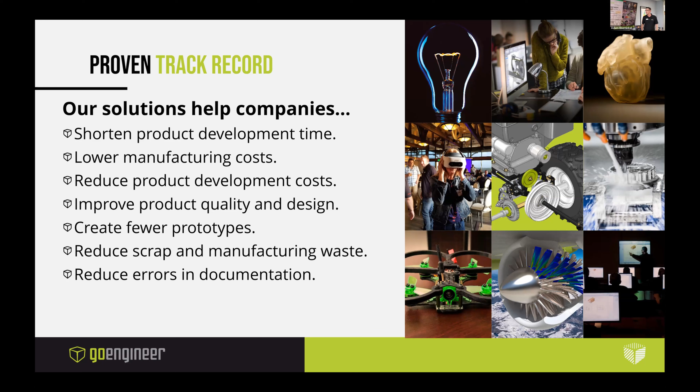Application mentoring sessions is highlighted there. That is not training, but the ability to schedule a one-on-one mentoring session with an application engineer. So something as simple as, hey, I have this new project, how would you approach modeling this, how would you run this FEA study? Anything of that nature, they're there, you can just click a link and schedule some time with them. Again, like I said earlier, training's big. We have 50 training labs across the country.

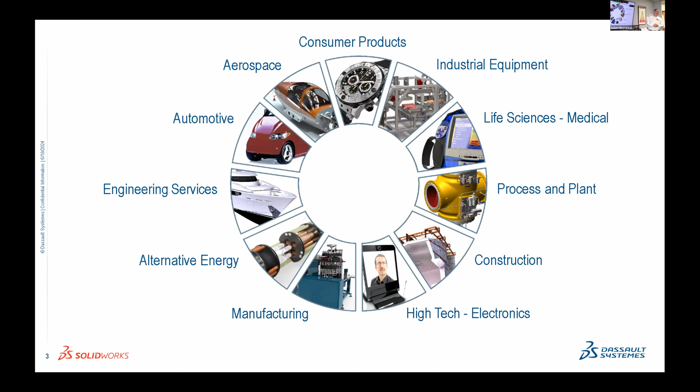In all these industries, automotive, here at Altec, that's kind of like almost your industry, as well as manufacturing and processes, with those cranes that you have on those trucks as well. But in all of these industries, what do you think they have in common? Yeah, CAD. Yeah, SOLIDWORKS. So why not master your skills with the SOLIDWORKS certification.

You may see, I don't know if you can tell, but there's some rain clouds up ahead. You may not know exactly where to start your certification journey. Sometimes it may feel like driving through a small town. It's like you'll get going and you'll gotta slow down, and then try and pick it up again. But where do you start?

We have different levels of certification that you can accomplish on your journey. Does anyone know the first level of certification? The associate, yes. And what about the second level? Professional, yes. And the third level? Expert, good job. So yes, we have 3 levels of certification.

Within our SOLIDWORKS certification program, the first being the associate, that's designed for anyone who has taken a training course or essentials. We highly recommend going to your reseller. They're the best at what they do and sharing their insights and knowledge for these trainings. But with any real training within SOLIDWORKS, you can take the associate to just prove the mastery of your skill level as a benchmark. And then when you get at least 6 months experience and you're a little more proficient at that tool, you can then take the CSWP, the Certified Professional Exam, which is geared to time efficiency, how well you can design for change, configurations. Brad did a really good presentation yesterday on configurations, I believe, and how to best use them. So all those essential tools will help you.

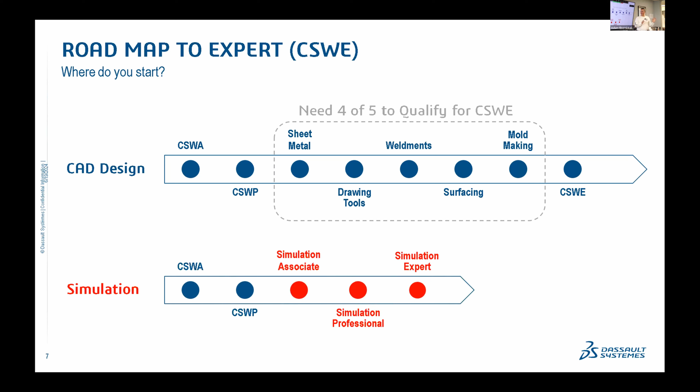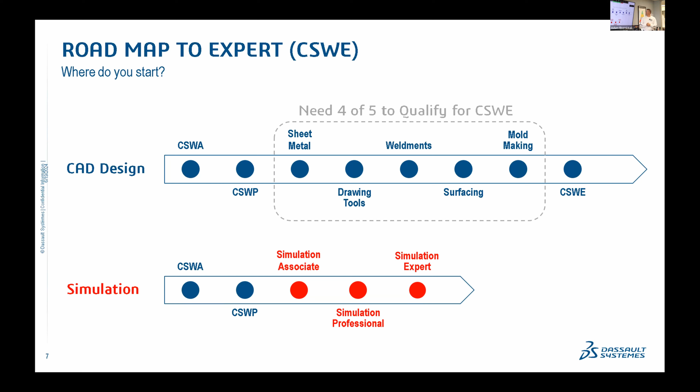Simulation. Yeah, we have an expert simulation track that you can obtain. Fewer certifications to qualify, but just another track that you can achieve to become an expert. And if you have an opportunity to visit 3D Experience World, Brad did a presentation in Nashville on some of the benefits of going to 3D Experience World and how to justify that trip. Well, becoming an expert, there's some incentives there that we give to just celebrate all the experts around the world. And so that's for the simulation track.

Now, some updates that we've done, just to educate you on what we've been doing this past year. We've actually consolidated some of our exams, as well as did some name changes, just to bring to your attention. One of those is with our SOLIDWORKS desktop, the CSWA, and we also have a CSWA on the platform for SOLIDWORKS. Well, now, with the SOLIDWORKS connected app on the platform, it's become almost in line with the SOLIDWORKS desktop, where you can take the CSWA with any flavor. So we really just consolidated those 2 certifications.

And now we have CAD design. This is our CSWA, the associate level. There's just 1 exam, 1 certification you can take, with the desktop or on the platform. I know Brad and Adam are using the SOLIDWORKS connected app for their presentations. And with the exception of the reload, it's very, very similar with all the functionality and tools. So it's getting there. We hope by the end of the year, the SOLIDWORKS connected app will be in line with the desktop version.

Now, if you happen to mate things to those patterns, it's got to go back through, solve the mates again, and reload, causing a circular loop. So that's a little preview of what is to come. Go to the next slide here. And then it displays the results on the screen. Kind of complicated, right? Just to open a file. Okay, so here's the whole process for just opening a file inside SolidWorks.

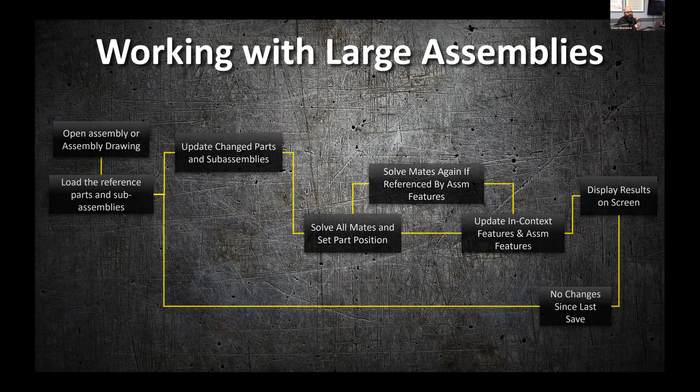Oh, yeah, big deal. How does it apply? Well, think about an assembly that you've opened and it's taking a lot of time. Which part of the process is it slowing down on? So we're going to go into some large assembly tips and tricks now and kind of go from there.

So first things first, SolidWorks settings. Now I know here at Altec, we deploy a standard out of the box set of settings. Okay. Yeah, set of settings. But we do, the admin image has room for you all to make your customizations. In the chat, you guys, depending on what company you're at, it depends on what they allow. Sometimes you're not allowed to change anything. Sometimes you're allowed to change everything.

That's kind of scary. So, both. It is kind of scary.

All right. So, we're going to dive into our large assembly settings here. And so it's going to be on the system options side. Under assemblies, we have some options here that I like to keep selected. I typically don't do autosaves on large assemblies when it's in large assembly mode, so I turn that off. Do not rebuild when switching between screens. I hide all the planes, sketches, and annotations inside of assemblies.

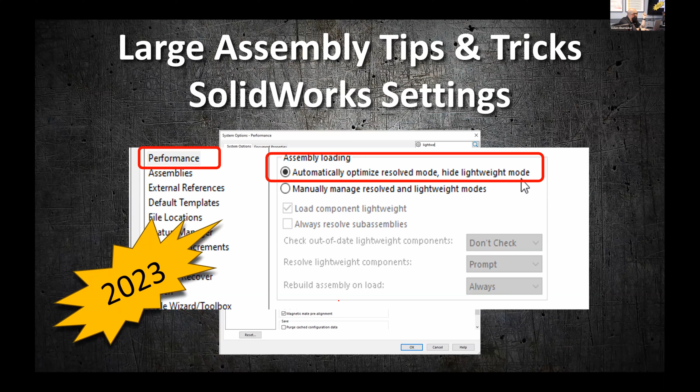Another thing too is if you're trying to take measurements or pick midpoints for measurements, because they are lightweight, you can't pick a midpoint. Before you could expand it in your feature tree and it would resolve it. Now you have to physically go and open the part to get it to resolve and then come back. Or tell it to set to resolved in the feature tree. Actually, I don't even think it's there now. So this was brought in 2023. This is set up on all of our company deployed laptops. Yeah, resolve, not the feature tree.

Well, now that you got your settings, let's get to work. But wait, there's more. Slow down before you do anything. Think before you open, and ask yourself, what kind of work are you going to be doing? So we got two camps, right? If you're opening a file, you're either going to be modifying that file or referencing or viewing it or showing it off to a customer or a supervisor or a colleague. So we'll start with modifying your large assembly.

Well, we're going to start opening this part here. It's 42 megabytes. Pretty complicated. This is part of a sales model for a crane. So I'm sitting there thinking, this is going to suck. And for people older than 30, you might recognize this movie. The sweating happens. Am I going to crash it? Do I have everything ready to go? Do I need to go get a coffee break? I don't know. We're going to do an investigative open first on anything that I've never opened before. We're going to jump back into SolidWorks.

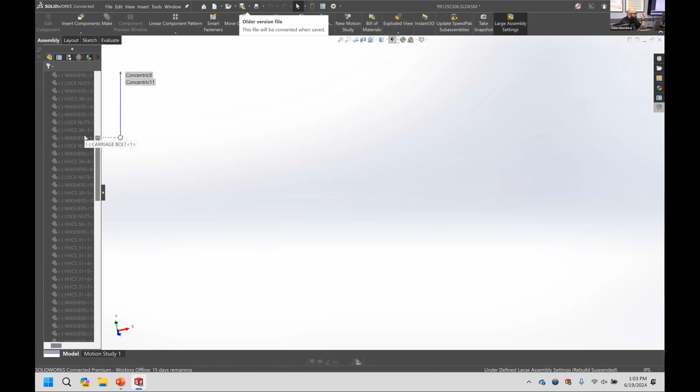So what's it going to do? It's going to open that file. Nothing's going to be in it resolved. But now I can see all the parts that are listed, what files are going to be where, and start rolling them back, unsuppressing them or activating them, and seeing where our issues are going to be.

Why is this file really large? Is it the shape of the part? Is it the number of parts that are in there? What's going to be causing my problem? Now, because I just picked the chassis, it might take a minute. But it's going to look for that file and it's going to pull it and resolve it, fully resolved, while the rest of the stuff stays suppressed.

And it's going to make a liar out of me. It's going to crash, I bet. We'll see.

Well, while that's waiting, we'll jump back into the PowerPoint. I'm going to show it to you again in photo form for the people that are on the Zoom, so they can get screenshots. Find your model you want to open. Click the configuration drop down, go to advanced, pick the configuration you want, or create a new configuration of structure only, and then it'll open with everything in there suppressed. So you can just work your way through.

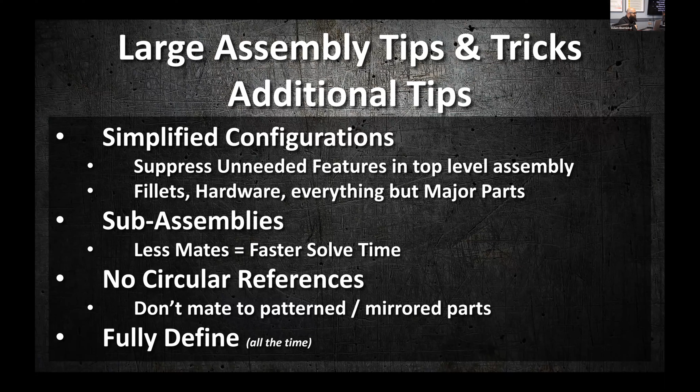So, big stuff: limit your complex features, helical sweeps, threads, get rid of them. If you download parts from McMaster-Carr, double check that stuff. They have the image quality cranked all the way up, all the threads shown, all the fillets there, everything's in there.

Defeature your parts down with simplified configurations. Patterns and mirrors are your friends. Use them. They are a faster calculation, because instead of having to find and recalculate where this new screw is going to be, it's just moving the body.

Roger had a question: I understand fully defined, but if clocking the part doesn't matter, like a bolt, does it need to be locked down? Yes, it does, because SolidWorks is not having to think about where this is going to move to. It might be just locked in place but spinning, but the software is still having to anticipate the change.

Local files: with us at Altec, we're good. We pull everything from a PLM to a local drive on our machines, except the one I'm working on, because I'm working off my Google Drive for this presentation. What it's doing is eliminating the network problem. You're not having to transfer data across fiber or CAT lines. You don't want that, you want to be able to just use your machine as a resource.

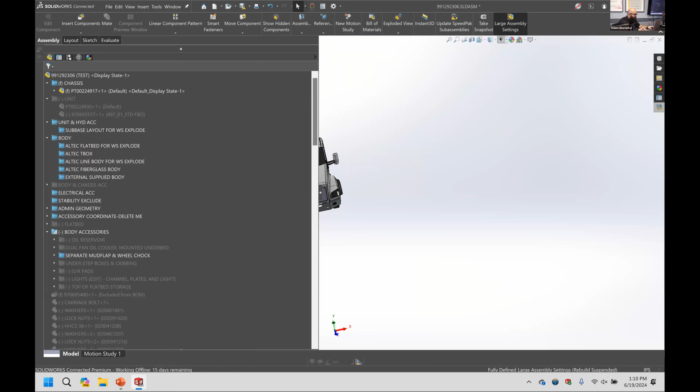Oh yeah, there it goes. See what happens when you pull it off the network drive, it's got to download through the Wi-Fi. But let's close that back out.

So now that we've created the model, we want to show it off to our customer via a PAM kit, or at a trade show, or to some of our buddies, like 'look what I designed this week.' So don't fully resolve the model. If you're not planning on doing any work in there and you're just showing it off, don't resolve the model. Use large design review, it is the shortcut.

So we'll do the same thing here. We'll open this assembly, right? This is a full sales model, it's 169 megabytes. We can go into our open tab, click large design review, and it'll open there. That's under your recents. But if you're going to pull it from open, you can do the same thing by clicking the part, selecting the slider to large design review, and hitting open.

Another way, which I learned from Alin: if you're going to grab and drag, this one's one I learned recently. Click the part, hold the Alt key, drag it down. Let's see if it does it on the connected version. It should pull the open screen. If not, I just wasted everybody's time.

Yeah, I didn't. So it looks like it's going to resolve it. But I believe when you click and drag it in, or click and hold Alt and click open, it should allow you to do that. Let's just stop that real quick and close it. We'll crash it. Oh, taskbar settings.

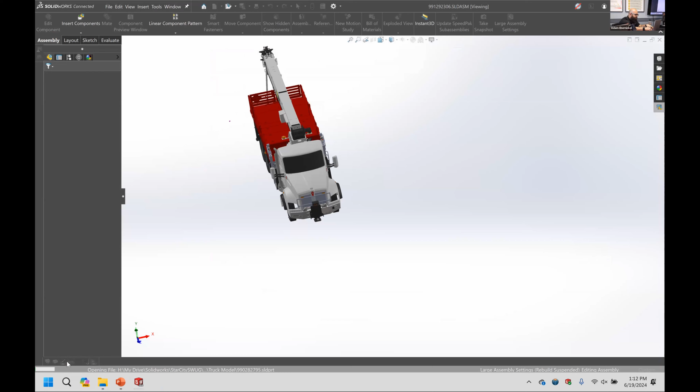End task, there we go. All right, we'll pull that up again. Now I've got myself curious and I want to make sure I get this right. Oh, my mouse is still... all right, there we go. We'll open that back up again. You're saying hold Alt. I did hold Alt and drag it in. I'm wondering if it's the connected version. I think it's a SolidWorks Connected thing. Okay, we'll try it with Alt and then click the button.

It's the first crash of StarCitySWUG 24. If you hit Alt and click it, it won't do it. On regular SolidWorks, you hold Alt and drag it in and it'll open your auto. It'll open the... dang it, I don't want that. What'd you say? Epoch says drag in and then before leaving, hold off. So maybe it's the timing of when you hold Alt. I don't know, we won't worry about it right now.

There we go, interesting. Well, I somehow broke SolidWorks and Zoom and the TV. Does everybody on Zoom still see me? Okay good, just want to make sure. I don't want to break everything. I can't get rid of that. I know. Okay now, jeez. Actually, there we go. First crash of...

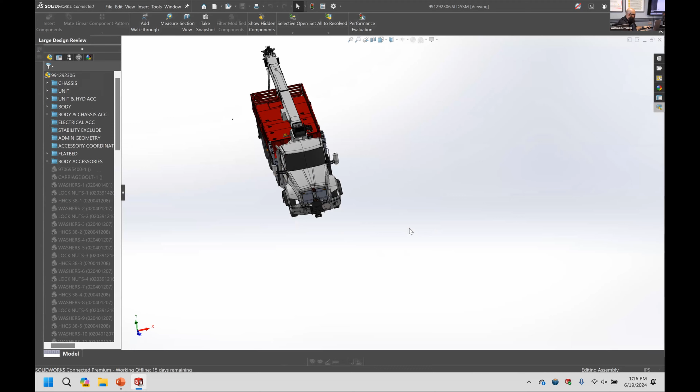All right, so okay, stop. 38 seconds for a full sales drawing. All the parts are there. You might be able to see the icons have a little eyeball on them. You're just viewing them. You open inside the parts all the way down to just the parts - there's nothing underneath the feature tree, it is just a graphical image.

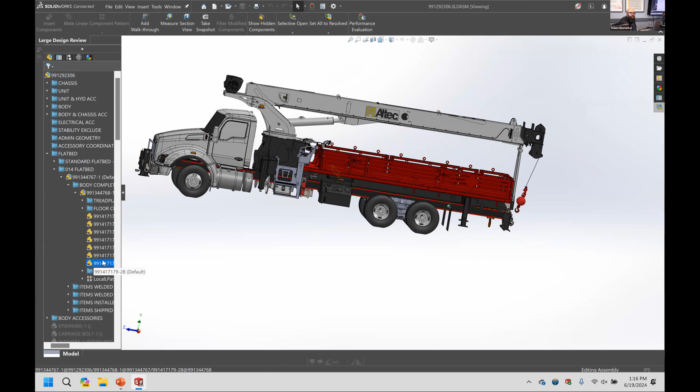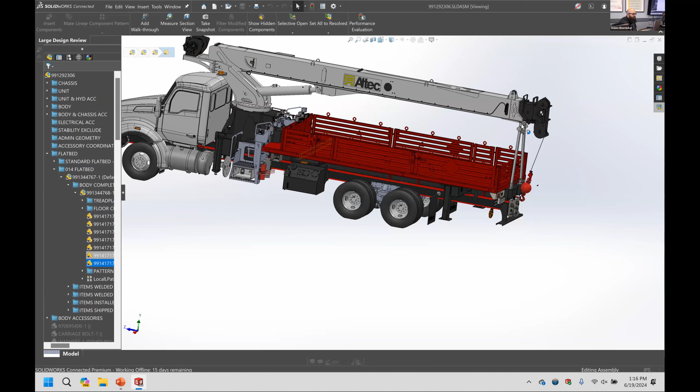We'll go to our selection tools. I'll select what I want to select to open. I know I'm just going to work on this section here. I'll do my selective open, just those components. It's going to open it and show only those parts that I'm trying to work on rather than trying to reload and resolve everything.

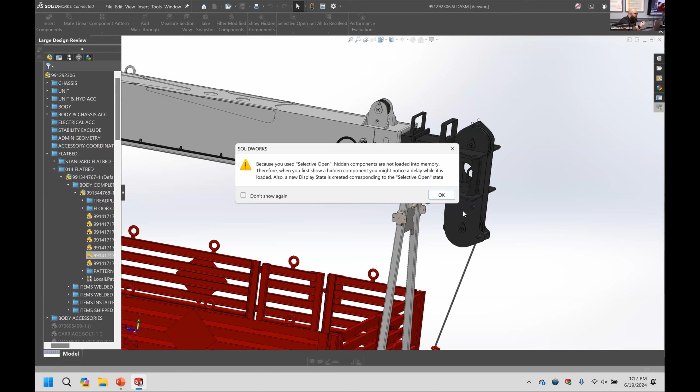Using this tool will help greatly expedite your process when you're trying to do drawing creation or part creation. So now all the parts that I'm looking at working on are fully resolved. The rest of them are hidden, and I can go back through and find the things I want and unhide them as I go.

So we'll kind of pause on this screen here. The pop-up that comes up says these are the things you can and can't do inside large design review. It'll allow you to create section views, hide/show components, and walkthroughs, but it will not allow you to insert, delete, move, or edit mates unless you tell it to edit the assembly, which is a newer feature that'll give you some more data you can compile. So it's a limited amount of functionality.

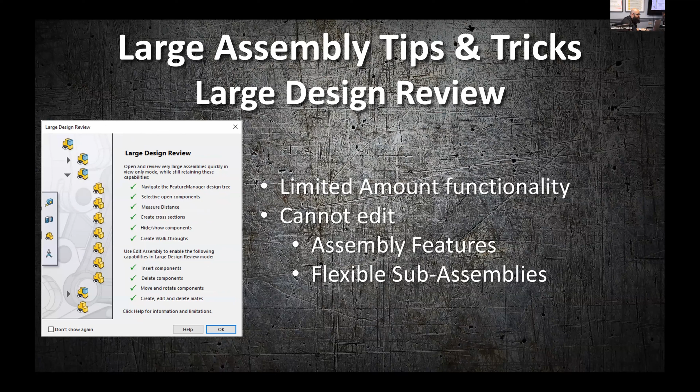You cannot add things. And if you have an assembly feature like an extrude cut that goes through something - if you've got a piece that's welded together with a bunch of parts and then extrude cut for final machining - you will not be able to edit it. And if you have any flexible assemblies, it won't allow you to go into edit mode.

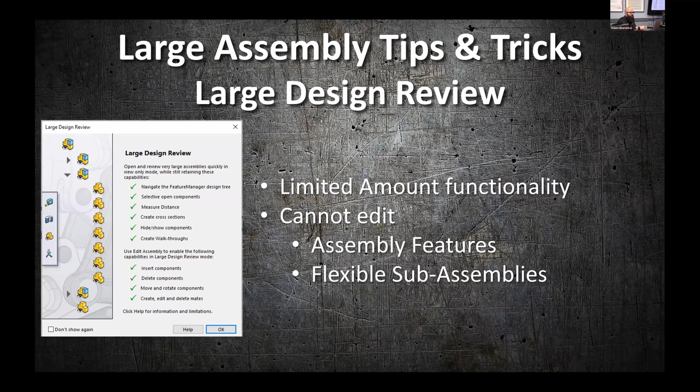So you'll see we got your own tab up there for large design review only. This gives you everything you can and can't do, hidden as needed. And as you can see, you got the little eyeball there showing beside the Lego brick to let you know that you are just viewing those parts only.

So now that we've got our assemblies done, we're working on them. Now we got a drawing, right? You got to always have a print currently. So keep in mind, you open a drawing, it's got to go through all this process up on the screen with the assembly first before it attempts to open the drawing. It's got to open, you got to tell it to open, and it's got to load all the reference parts, and it's got to update any changed subassemblies, solve the mates, solve in context features.

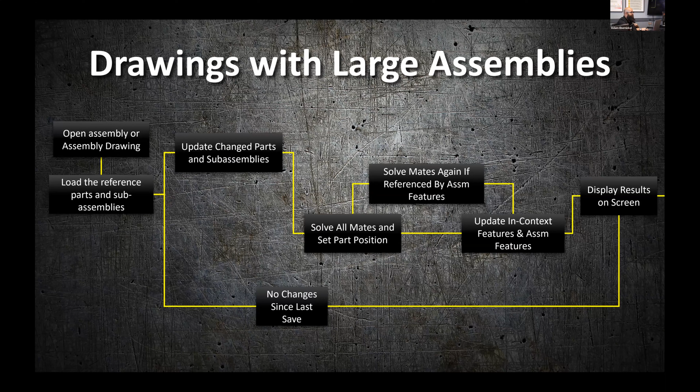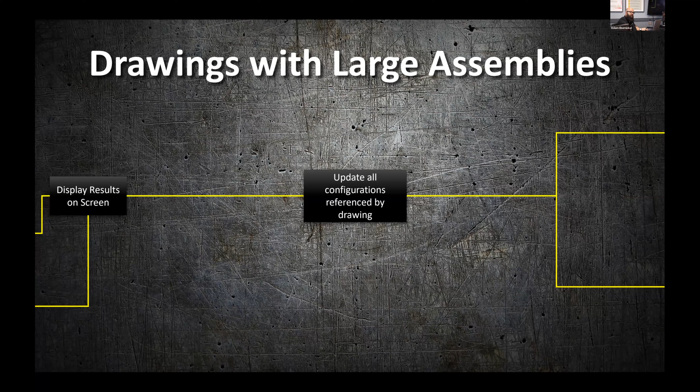It does display the results, but afterwards, it finds any configurations that are referenced in the drawing. It updates those. And if it has parts that weren't loaded in that configuration, it's got to go back through, find all the parts, load them, and resolve them inside the drawing.

Then it shows all the updated assembly views as draft quality, and then the high quality views are getting solved as you're looking at the screen. It's displaying them as draft quality while it's resolving all the images.

And once it goes through draft quality views, it starts solving the dependent views. So if you've got detail views, section views, that kind of thing, it locks those down afterwards and then converts them to high quality, which is a better view. It's not as pixelated.

And then afterwards, it displays all of that on the screen as a specific line font or whatever layer.

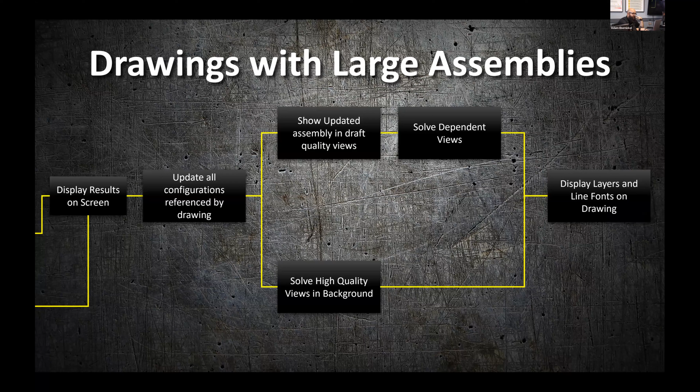So with that, we'll do some drawing tips and tricks. Think before you open, and consider what kind of work you are doing. Are you modifying or are you viewing? Same thing as before: if you're modifying a drawing, you can go into detailing mode or resolve mode.

Load only the sheets you need. So if you're only modifying, say you have a 10-page sales drawing but you're only going to modify just the 2 pages you want, go into your open tab, find the drawing you want to open, select the sheets you want to pick. That's it. All the rest of them will be view only. It'll only resolve the parts that are in that page.

So if you've got different zoomed in features on different pages and you only want to work on one page to update, load only the sheets you need.

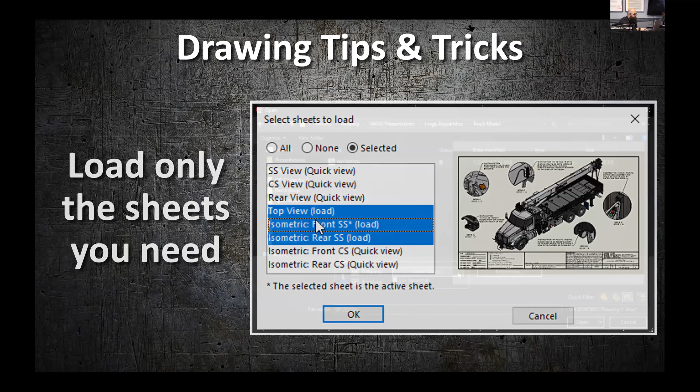So if you're reviewing it, use detailing mode instead. Detailing mode loads the print in view only mode. The whole drawing essentially becomes lightweight.

So you got your detailing only selection. And to fully use detailing mode, you have to tell it to, in your document properties, save your model data inside the drawing and the view palette, with the caveat that it increases the file size by orders of magnitude.

We're talking 2 to 3 times file size. So just be very careful if you're doing something with a sales drawing or a large assembly. It'll actually make your drawing very large.

So inside detailing mode, you'll get a warning at the top. It says, hey, these are the options you're allowed, the rest of them are not allowed. So if you want to resolve the drawing and do more stuff, you can do that, or you can just use the options that are available on the screen, creating notes, dimensions, things like that.

But if you don't want to take the size hit, you can view the limitations. These are the things that you won't be able to do. These are not available in just view only mode if you're not doing any editing.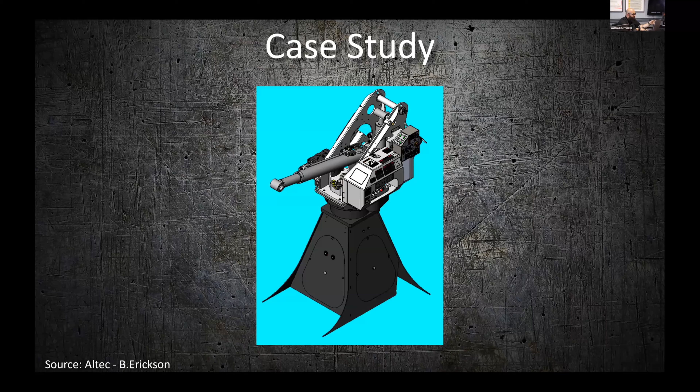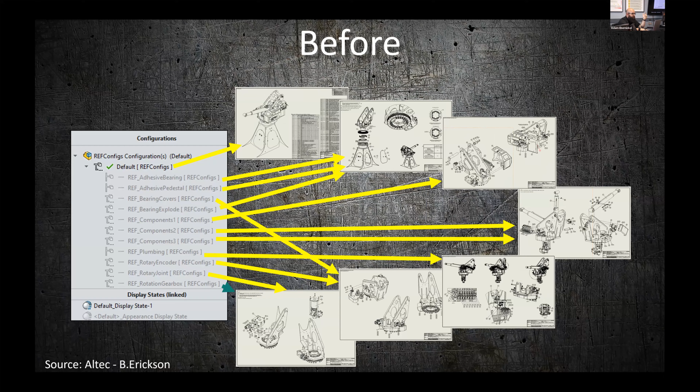So I dug through this yesterday. We have a drawing with lots of configurations showing very different things on each page to convey the information, using configurations to hide and show parts. I'm not mad, but I want to know who did it.

Instead, we converted it to use display states instead.

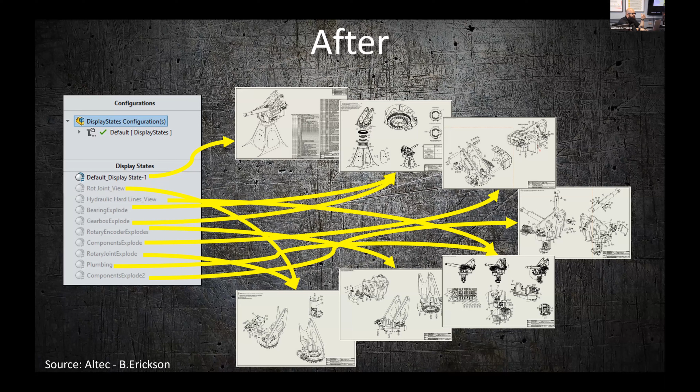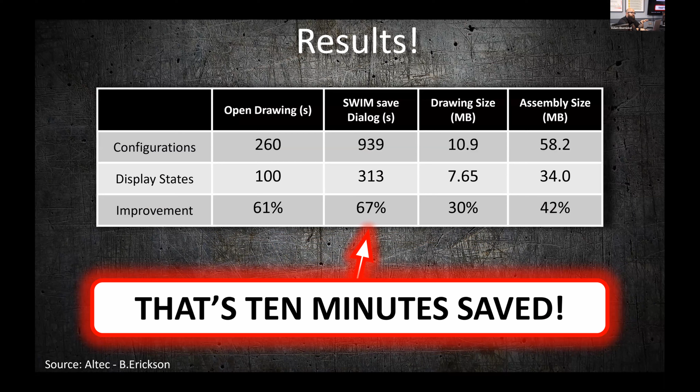Machine tips: set yourself up for success. If you have access to it, get 64 gigs of RAM installed in whatever machine you're using. 32 gigs is, I consider, the bare minimum. 64 is better. Faster CPUs. We're talking 5 gigahertz single core speed. You want to be able to get it working. Solid state hard drives, most everybody uses that now. Faster opens and saves than disk drives.

And then do not use gaming GPUs, use actual enterprise GPUs. I know some people will try to cheap out and use gaming ones because they are cheaper, but the calculation engines inside of them are different for gaming versus enterprise work. So this one in this machine's an A5000, fantastic machine. So kudos to HP for giving these to us for the week.

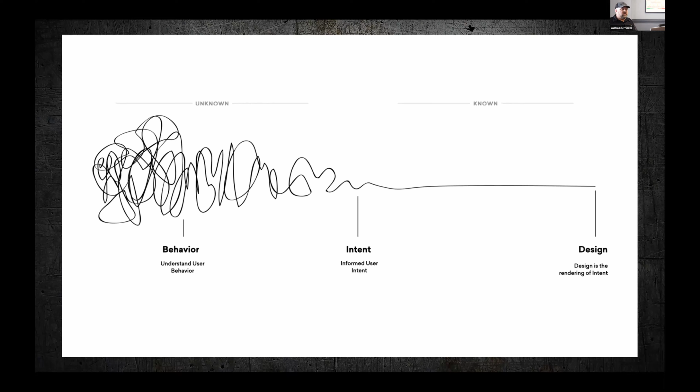So we're looking at what is design intent. And so the first thing I wanted to look at, and I love the SOLIDWORKS resources, the help tools, you go up there and hit the little question mark in the top right-hand corner of your file manager bar. And this is what SOLIDWORKS says, right: design intent is how your model behaves when dimensions are modified.

I would go a little bit of a step further than that and say that design intent is the method used in computer-aided design that defines relationships between objects so that when you change one, it's going to automatically propagate another one, right? So that way they go hand in hand and they work together. In SOLIDWORKS, we refer to design intent as the plan of how a model should behave if and when you change it, right?

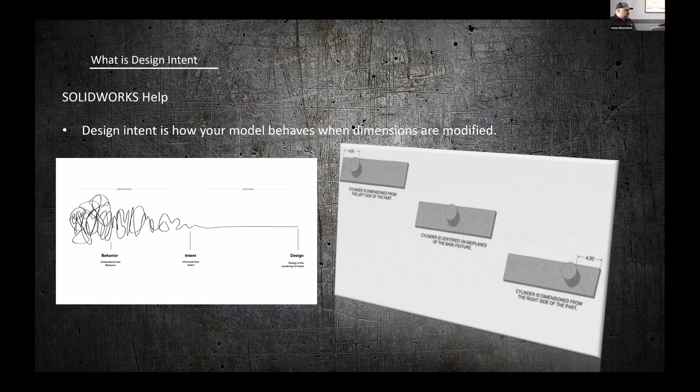An example of this, I would think, is going to be, say, this image right here. Whether it's an extruded stud coming out of a plate or a hole in a plate, how do you design that hole? What do you expect that design to do when you change or modify the plate or the hole, right? What's going to happen there? So SOLIDWORKS captures the intent of the design and includes relationships, parameters, and how the models are going to behave for you, right?

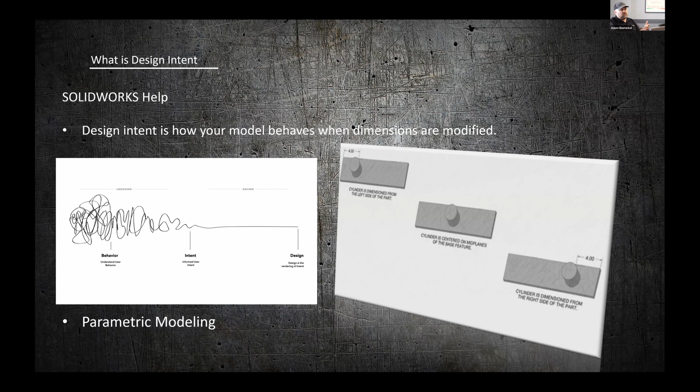But in thinking of design intent, you also have to think, what is parametric modeling? Because that's almost what's dictating and helping us out with our design intent. So what is parametric modeling? Well, everybody remembers the days of AutoCAD, right? The software that shall not be named that GoEngineer started with, we found out today. When you messed with AutoCAD or one of those types of software that didn't have some parametric understanding to it, you would draw it, and if something changed, what'd you have to do? Yeah, basically delete and redraw it for the most part, especially if it really changed.

And so the key advantage of parametric modeling is when you set up a geometric model, the shape of the model can be changed as soon as those parameters are changed. As soon as you go in and change a dimension, it's going to change, whether those dimensions or the curvature are modified, and keeps you from having to redraw those features or that model.

All right. And so let's look real quick. Kind of got ahead of myself and didn't skip through this. Let's go ahead and show the slide. So yeah, finding the minimum number of constraints to make this work. Let's jump over to the CAD model, right?

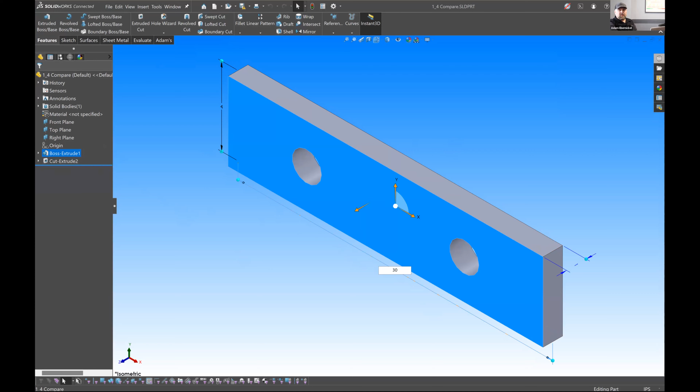Let's look at this plate, for example, and how these holes are dimensioned. What happens when I change the overall measurement of this plate? Just based off what you've seen here and how I have those holes constrained, when I change maybe this dimension to a 30, what do you expect those holes to do? Yeah, go out with it. Go out with each end, right? They're tied to the ends.

So maybe my design intent is that I always want holes to be 4 inches from the edge, right? Maybe I need that as a parameter. Why not design it that way? Because if I go in and design it maybe a different way, say something like this, what's going to happen there?

Yeah, I mean, they're going to stay in the middle. Maybe I always need those holes to be 4 inches from each center, from the midpoint, 8-inch overall, centered about the mid, right? Maybe that's where the mounting is. And so if I know a mounting is always going to be there and I just need the plate to get longer, maybe it's a spacer and I'm just trying to mount it to the same holes. There's my design intent for that. My hole spacing is always going to match and the spacer is just going to get bigger as I need it, right? And so when we think about that and kind of going back to that one slide, there's a lot of different other things we can think about too.

Okay, so we're going to talk about design intent with parts a little bit more, just basic parts. We're going to talk about a simple cylinder. How many different ways do you think you could probably draw this cylinder? Well, let's look at it and let's kind of think about it. And there may even be more than what I have on here, right? All right, so the first one we'll say we can extrude it, right? And this may be the best option for controlling the overall depth of it. Maybe the depth is what we're after. Maybe the height of it or the length of it. Maybe that's the ultimate goal.

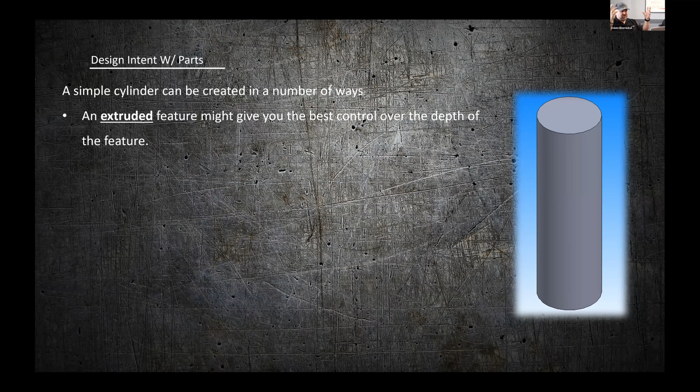And so we're going to go extrude. My opinion is I always like to extrude about mid-plane, right? So everything's balanced with the planes. It also helps with mating stuff, especially when you're trying to think that planes are your ultimate guide because anything and everything else can change but the planes. Right? So that's always a good key.

Well, maybe we need to revolve it. We can create it as a revolve, right? Well, a revolve is going to do what for us? It's going to help us with the revolution. Maybe we don't always need it to be 360 degrees. Maybe we only need it to be 180 degrees. Maybe we only need half a pin, right? What if we swept it, right?

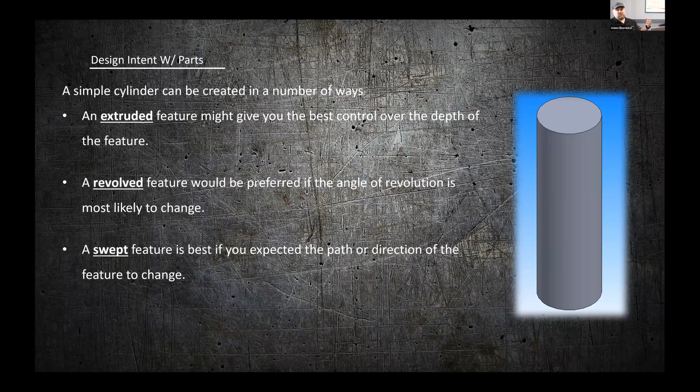Now, when I do rods and pipes and stuff like that, I tend to like to use sheet metal, because I can utilize those features in sheet metal, go in and put radiuses on the outside or even sweep it after I create the sheet metal, because then within the sheet metal, I can use my bend table to know how to flatten it and know what my flat stock is going to be before I bend it. Now, the caveat with that is it has to all kind of be along one plane. When you start going into another axis, then it doesn't work so well. And maybe that's where you need the sweep. Maybe the path of the direction is more important than the sheet metal feature is.

And so I always tell people, especially in some of the other presentations I've given, Basics 101 and how to maybe define things, and my sheet metal advanced presentation, I always caveat things. These are things I say you probably should do, but design intent is the master. Where you plan on going and perceive that model to be, how it is to be utilized and grow in its life cycle is going to be the ultimate thing that trumps all.

Okay. But each way, and I tell this to my kids, and I'm gonna preach it here too, life has consequences, right? Whether good or bad. You can make a good choice, you can make a bad choice, you're gonna have a consequence either way. Modeling's the same way. I don't know about you guys, but have you ever modeled something, 5 years later go back and look at it and say, what the heck was I thinking? Right? And so we learn from those consequences. And I'm hoping this presentation helps.

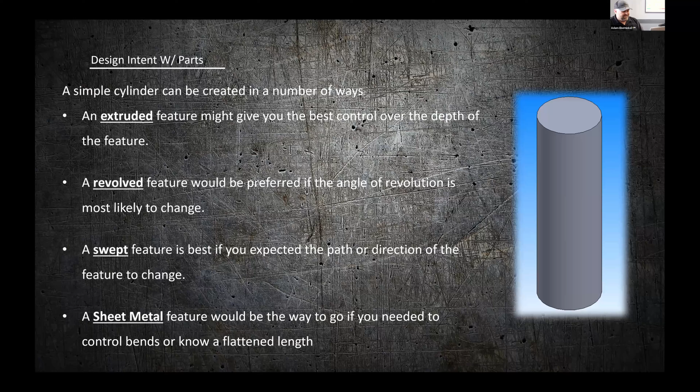Okay, so to save time, I'm not gonna jump into CAD and show you how to model a rod based off of those. I'm gonna save you that trouble there. And we're gonna kind of skip through just to help speed this up a little bit. Equations and dimensions. This is big.

Not only in just your normal day-to-day design intent, but when you look into getting to automation, DriveWorks, KB Max, that kind of stuff, and even more so with configurations, right? Because another way to ensure design intent and flexibility within your parametric modeling is to utilize equations and expressions, basically taking what you're trying to input into your design and making it a mathematical property that can actually be flexible and link those parameters and constraints to other things, right?

And I mentioned this, I think, day one in Nashville. I did a tips and tricks let's play as a little game we did. And one of the things in the game is, can SolidWorks compute pretty much anything you put in? If you put 1 + 1, is it going to tell you 2? Yeah, it is. But one thing you have to keep in mind is, although it will do that, if you want it to constantly compute, you have to put an equal sign in front of it, right?

Once you put the equal sign in front of it, you'll notice it'll give you the Greek E, the summation sign. It'll actually add it to the dimension itself, so you'll know the difference. If it doesn't have that and you intended for it to always calculate the equation, then know that it needs to be there. If it's not there, it's not going to always compute that equation. It's just going to do it once for you and be done.

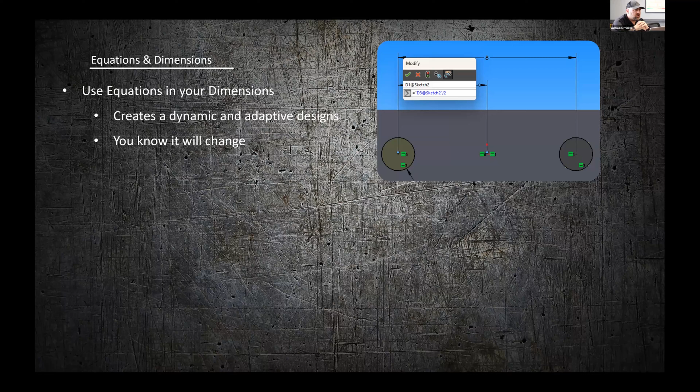You can go in and name and put stuff in folders, but you can also do that on the sketch level and name your sketches. There's a little bit of diminishing return there, right? But name some sketches. If you think it's something you're going to use, name the sketch. And then when you go to type an equation, you know what the name of it is, and you don't have to say D3 at sketch 2, right? So keep that in mind.

David said, especially critical sketches. Especially critical sketches. Especially if you know that you're going to go into automating, right? If you're using KB Max or DriveWorks, or maybe you're using design tables and doing configurations and stuff. That's so important, because when you get into that table and you're looking at D3 at sketch 2, you don't know what dimension that is. That should probably be the length of your rod, rod length or whatever. But yeah, create those sketches dynamic and adaptive so that you can adjust them for different scenarios, conditions, and different requirements.

Use global variable equations, right? This is big, and I'm referencing this one back to certifications. If you want to win at certifications, CSWA is probably not super important, but by the time you get to CSWP, you better be using global variables. They're going to tell you at the beginning of the question that A equals, B equals, C equals. Set those up. Get it out of the way. Because then when you go to problem 2, 3, and 4 that match problem 1 and all they're doing is changing global variables, you're already set up for success. Right?

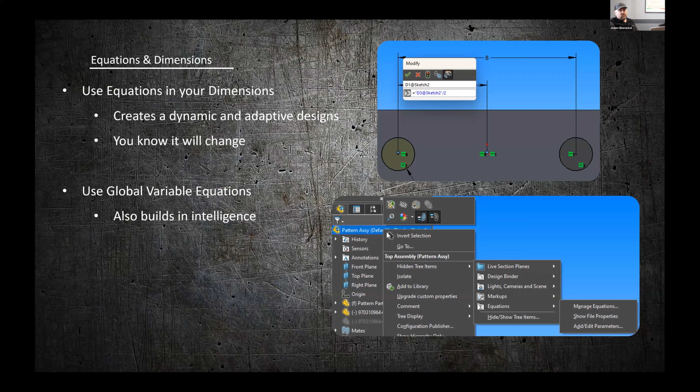It builds an intelligence that you don't have to worry about. It helps your model grow and relate to those equations to where it's almost intuitive, right? Who loves their cell phone when they can go to an app and it automatically kind of knows what you're thinking and what you're doing? Not that it's listening to you in the background, but that it kind of has an idea of you being a user.

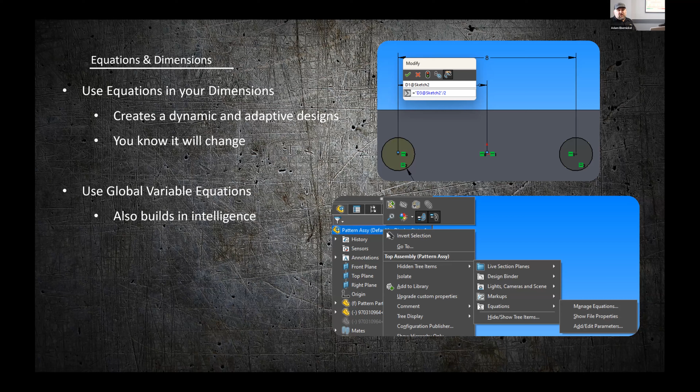I'll give you an example. We jump on the motorcycles. We're heading to Milwaukee next. You think my GPS has kind of got an idea I'm going to Milwaukee next, and when I jump on the bike and hit GPS, it's going to be right there for me? That's awesome. That's what this does. It does it for you, and we'll talk about you and the other people later, but that's one great thing.

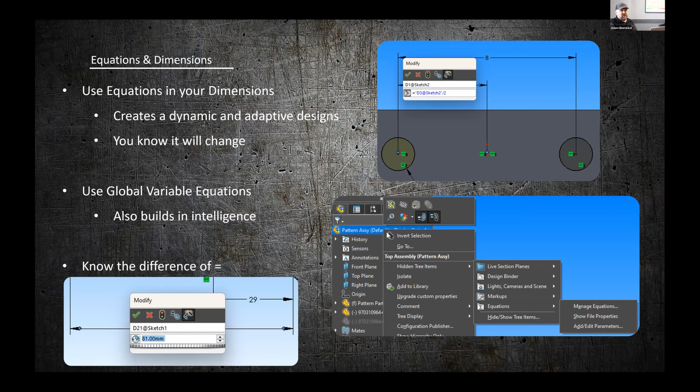And again, I already touched on this one. Know the difference with and without the equals. You'll see the summation sign if you set it up right. If you're using global variables, you'll also see the little world off to the side. That'll let you know you're using that as well. All right, so let's jump over here. I want to just illustrate a couple of things.

Anybody recognize this? Anybody in Zoom, you guys recognize this model? Yeah, few people nodding their head. Yeah, it's one of those practice ones for the CSWA, right? And if you come over here, you notice these equations are set up and such. I can go in and manage them, and if I want to change these, everything's just going to proportionally grow to the way I need it to be based off those values that's given in that.

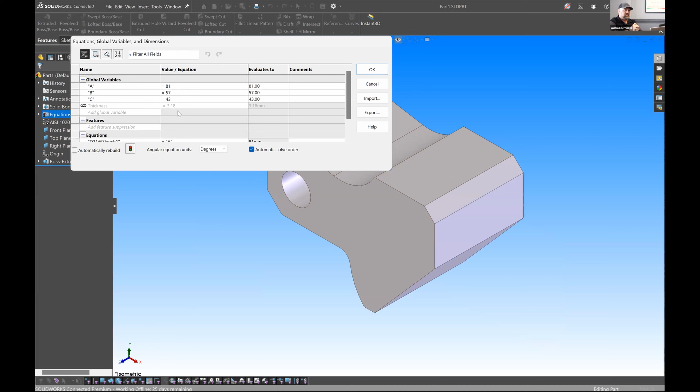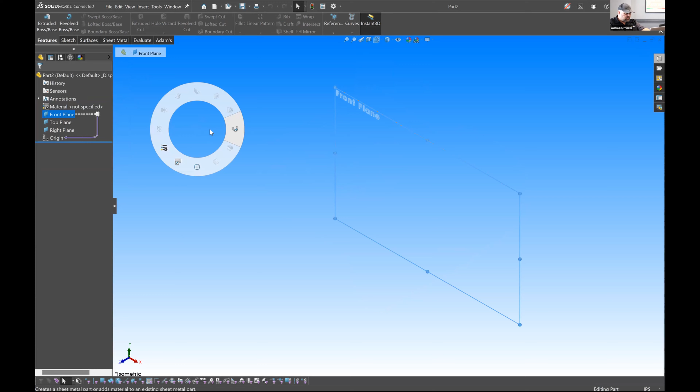There's a couple of ways to set this up. Right. And I like to just show this real quick because a lot of people think you have to do it one way or the other. And in case you're doing it one way and want to know the other, we're going to look at that real quick. I'm going to open up just a quick part. Let's go in and just draw a sketch here. Grab it on the front plane. Go here. Actually, no. I'm doing sheet metal. Let's do just an extruded boss.

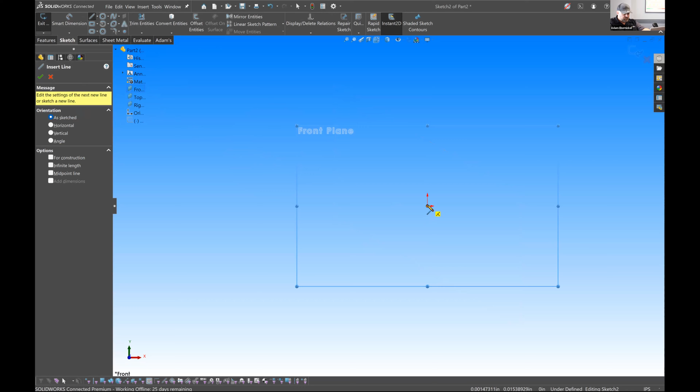Now, one good tip and trick I like to show is, yes, I have automatic on-screen numeric input turned on in my system options. It's already set up for you, so don't worry about it. But this is great because I can automatically go in here and give a dimension. It'll grow the line to that dimension. And then I also have the second feature part of that where it creates the dimension after I do that, right? That's a great opportunity to take advantage of.

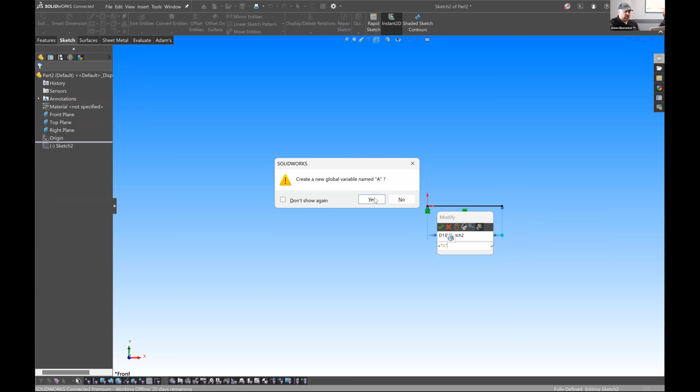So if I want to come in here, I can actually say this equals A. I didn't hit equals. I had the shift down. Try that one more time. And it's going to give me that little global variable. Notice in the feature tree, there's no equations built yet. I don't even have an equation folder there, right? And I can say, yeah, let's do that. I want to create a new global variable, and I want that global variable to equal 2, right? And I'll say, okay. Now it gave me the summation and it equaled it out. See that? Now I have an equation table.

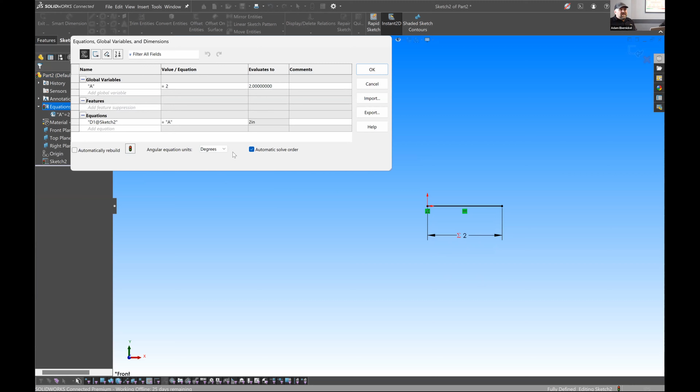I can come in here to the equation table. I can manage those equations. I already automatically have that on the fly. Global variables made easy, right? If I don't have global variables set up, say I come to this guy, there's no equation set up. All I have to do to set them up is right click on the top level name of my feature tree, go to hide tree components and come down to equations. And then I can tell it to manage equations or show the file properties and it'll automatically turn that on and off in my file properties.

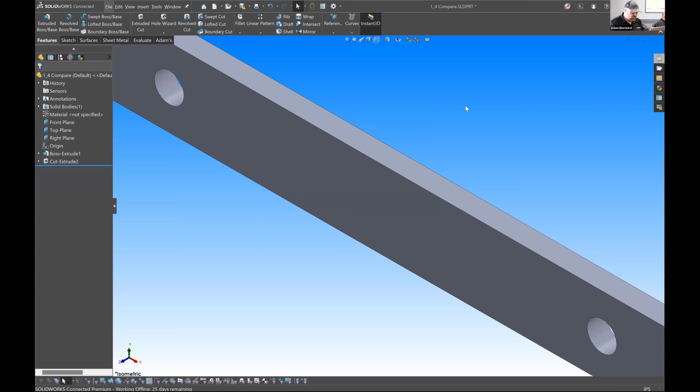So one of two ways that I like to use it. My opinion is if I know those equations are there, I'm probably just going to do the latter one, right? Add the folder to my feature tree and just list them all out. If I'm thinking about this on the fly, then I'm just going to do it on the fly, right? And just make it quicker and easier on myself. Okay, one more thing. Go back to this. And so that difference being, when we look at this, I'm just going to delete that dimension real quick.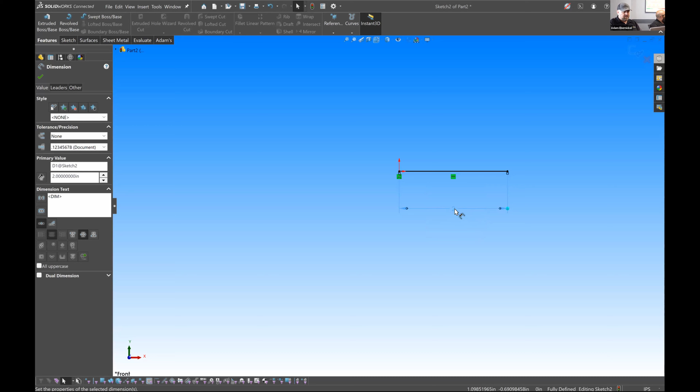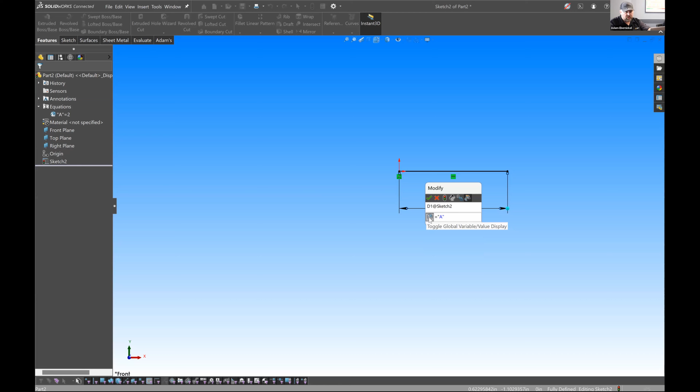Click. And so here's the difference: when I now have this regular dimension, if I say 1 plus 1, it solves it for 2, and you don't see any summation sign. And then if I hit equals 1 plus 1, I actually have to tie it to something. So let's tie it to the global variable. And the same thing holds true. I could say equals global variable A, enter. Now look, I have a little world that shows up and I can toggle that to show the value or the letter, either one. Sorry, I escaped out of it. One more time.

There we go. Now notice it gives a summation sign, which tells us this is an equation. So that's how we know the difference between constant compute and not constant compute. And if we tied it to a sketch, you wouldn't see the global variable sign in there, you'd just see the summation sign.

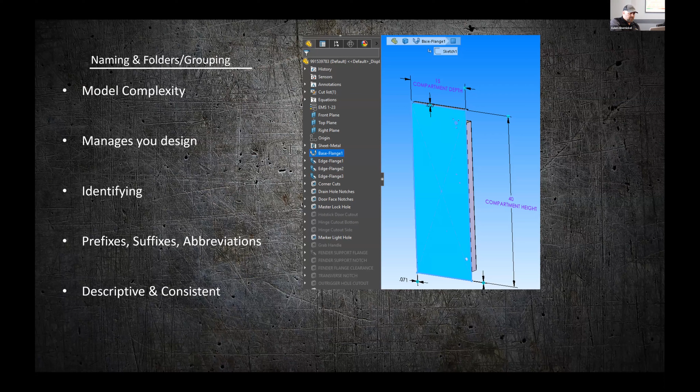Additionally, you can use folders for sub-assemblies and layers to group your design elements by category, hierarchy, and visibility. This is similar to using envelopes within sales models, like in body work. Categorizing things as completions, installed, weld-on, and so on helps - especially when sending to the floor or creating bills of materials. Here's an image showing overall folder structure, grouping things together so you know where to go when something needs editing.

There's also design intent with assemblies. Does anybody do top-down modeling or bottom-up design? I do a bit of both - bottom-up means building the parts and pieces then putting them into your top level. Top-down means working in your top level and building or adding new parts, cutouts, and convert entities from the top level, driving information back down. I actually do both, sometimes even a mix of both at the same time.

At the assembly level, the most effective method could be building design intent through top-down design. Critical parameters and dimensions can be managed through external references, tab and slots, pattern-driven component patterns, and sketch-driven component patterns. With that, you can later implement radical design changes - rather than modifying a dozen things, you go to the source of truth, modify it there, and let that drive from top down.

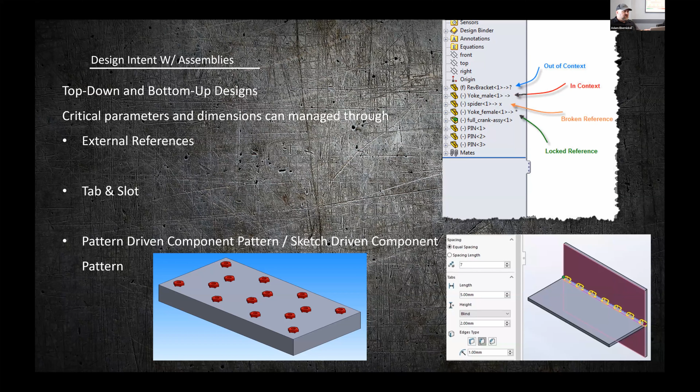Let's go ahead—I didn't know he was going to put this in his, but I put it in mine a different way, so that was a surprise when I saw it in his. Like, I scrolled through my thing, I'm like, I got to—but wait, there's more. So this isn't the end all be all. What I just said is just the tip of the iceberg. It's just to get you started understanding and getting your gears turning about design intent, and then seeing where it grows and goes from there.

That's the great thing about engineering—there's always good practices to learn and develop. It's not stagnant. The moment engineering becomes stagnant is the moment the world ceases to exist, I feel like. We're the ones challenged to create new and innovative things, so know that that's there.

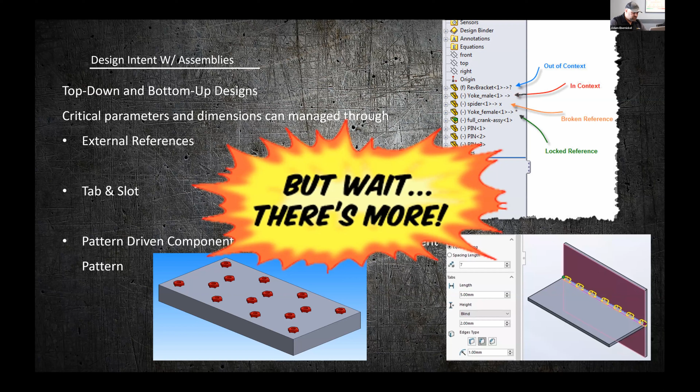Now let's jump in—or I'm sorry, let's go to the CAD model, and we'll jump over to this model.

And so I've got this set up for both ways just to illustrate two different things of the way you can do these component-driven patterns and sketch-driven patterns. Right now it is set up, I believe, for a component-driven pattern. And so if I come over to this block and I change any of these components, maybe the linear pattern,

and I edit that, and maybe all of a sudden they decided they didn't need it to go 7, they only needed to go 5, right? And I change that. And then I come back, it automatically updates. That was so easy. A lot easier than finding out which ones got screwed and deleting them and then trying to fix the other ones or restore mates or whatever I'm doing, right?

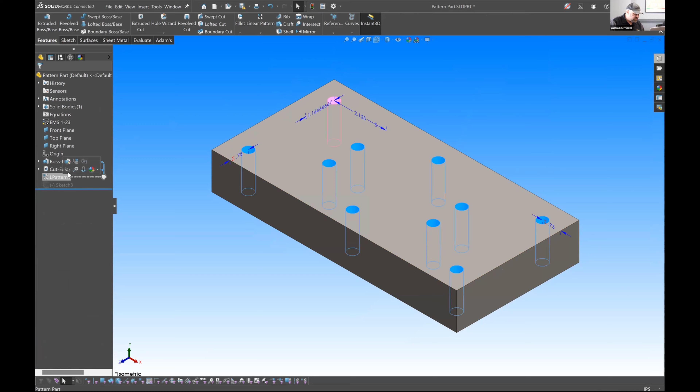That's with just the component-driven pattern. So all that is me creating holes, what I needed, right? And creating that design intent and then creating a pattern developed off of it. In this pattern, you can also see that I understood that maybe the manufacturer didn't need all those holes. So I was able to go in and turn some of those off and select different ones to skip instances.

There's so much in the patterning thing that if you just get in there, I mean, Brad does a great job showing varying pattern, where you can actually draw a sketch and have the pattern follow a sketch in the background. So that's pretty cool, for cutouts and stuff. So even that's there, and there's just so much in here. We have presentations just on patterning, right?

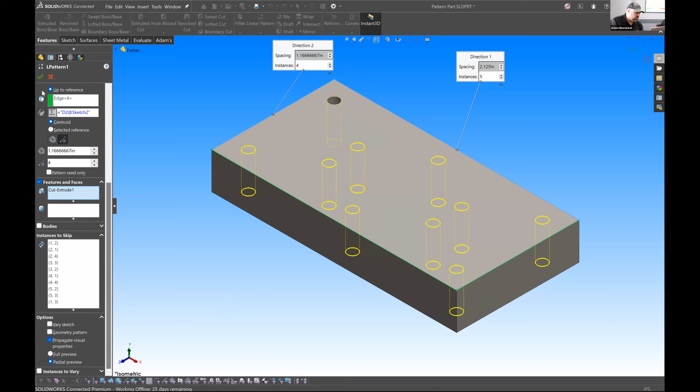So I'm not gonna get too much in the weeds with that, but create your pattern how you need to here. And then when you come in and you need that hardware or whatever it is, you only have to do one and then tell it it's a derived pattern, and the rest of them are just linked in. Right? As long as you don't get rid of the seed one, everything else is going to follow right.

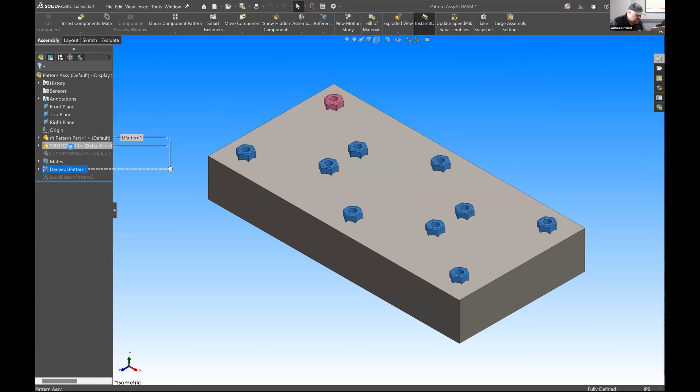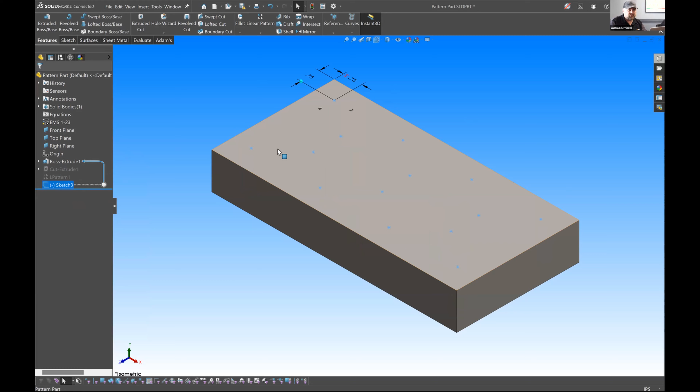Okay. So I'm going to actually suppress this one here and this one. And I'll come back to this model. And I'm going to suppress this pattern and cut out. And instead, unsuppress just a sketch, just a simple sketch that I have set in here. So it's kind of the same thing, just a bunch of points, sketch points. And then when I come back on this one, if it loves me, it'll work, right?

It's just located by sketches. So maybe you didn't need the holes, you just needed weld nuts, so you could maybe put a jig together and have some kind of locating for some bolt for them to line stuff up with. I don't know. All right, and so you can use sketches to do the same thing. So that's just one instance where you can look at that stuff and see how patterns can work with you and for you, all the way from the part level to the assembly level. And also create those files and make them a lot more efficient within SolidWorks and the calculations it's doing, but also for yourself when you come back and you're trying to fix something or change something.

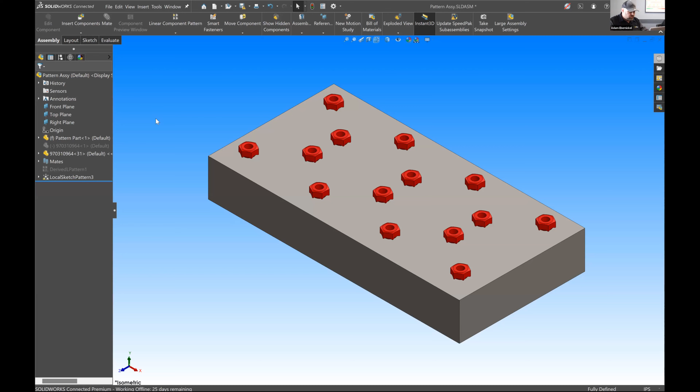Who benefits? You, the designer. You benefit. Because when you do go back and look at that model 10 years later, you don't want to say, who did this? You say, that was pretty smart. I know exactly where that marker light hole is. Right? So, I mean, it gives you a leg up when you're coming back to stuff. So you benefit because you have the resources and tools to help you succeed down the road.

Your checker benefits. When you hand this off to a checker and he's going to look for certain things and make sure they're up to standard or whatever the case may be, he doesn't have to spend an extra 30 minutes checking your work because he's having to hunt down certain things or maybe certain cutouts that need to be a certain size or whatever those standards may be. He can go right to it and look at that stuff and see, hey, this guy's got it together. I can trust his design probably a little bit better than I can the guy that didn't. Right? You can trust my design. Yeah.

Your successor, or the person that takes on the job or the responsibility after you: when you set up a part or an assembly for success with good design intent, the next person, even though, yes, they're going to need training and need to be brought up to speed, think how much easier their job's going to be when stuff has been labeled, when sketches have been worked on, when patterns work the way they should, so they're not having to try and figure it out and possibly even mess something up and cause havoc for the shop or even the customer because they're trying to figure things out on the road of hard knocks.